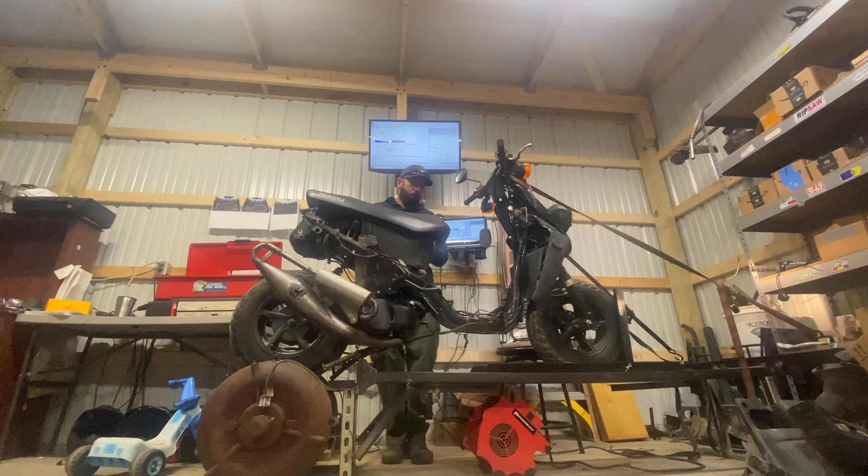Today's video is going to be back on the Yamaha Zuma 70cc big bore kit. Pretty much, yeah, we've taken a cheap China big bore kit. We had this big bore in the past with the Polini Sport. Awesome, reliable kit. I think it lasted like 5 years or something like that. And yeah, we beat the snot out of this thing. It was wrecked multiple times, not by me once again. I did pretty good on this thing. But yeah, it's been through hell, guys, needless to say.

And I just want to get in here and just do some performance stuff to these kits. More than likely, Junior's got one on the way too for his clone engine over here. But more than likely, we're going to have several of these cylinder kits. So if we blow it up, we blow it up. We're going to kind of twist around and try different things, and we can all kind of experience it together on a dyno back here.

First thing we're going to do is kind of set it up as kind of like a stunter little wheelie machine to have some fun right out of the hole. And then I got some ideas of maybe opening up the exhaust port duration and putting a nasty race pipe on there and really trying to make some power. But we got to keep where we want to make the power in mind, guys, right? Because the port timing numbers are everything to match the pipe.

Come on back here and take a look at some of these cylinders, guys. So we have our array of cylinders, and like I said, Junior's got his clone engine back here, and some of my junk I have. We had a, what was it, an Eton Beamer? Allegedly, it's a Minarelli, I guess, clone engine for the Zuma. So we're looking for another one. The one we had is kind of rusted up and stuff. The engine and everything was just seized. Everything looks good with it. So we just got to get some new parts, and he's got a big bore kit on the way.

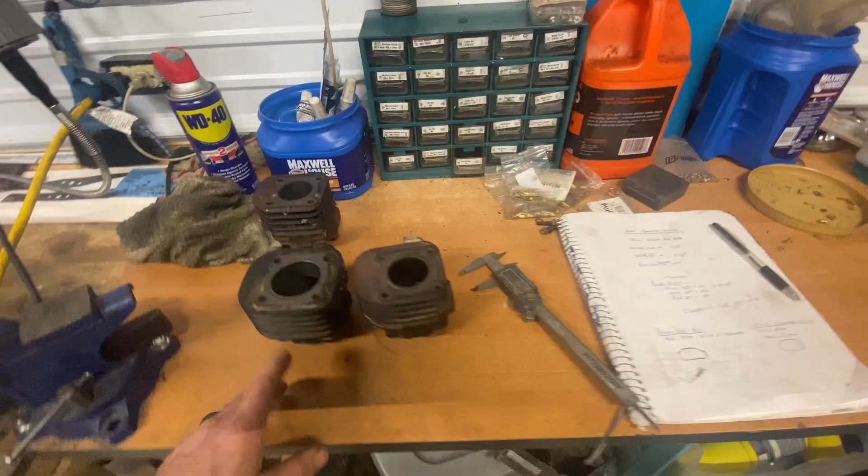And if I like the big bore kit, might end up getting another one for this, because we're going to be grinding away on this cylinder today, guys. So we may or may not like the outcome with matching this pipe. Obviously, we only have two different pipes we were fooling with. But anyhow, guys, here is the Polini cylinder and some info I just wanted to share with you guys. See if I can shed some light on the situation here a little better.

Pretty much between the stock bore cylinder and the 70cc cylinder, the port timing numbers appear to be pretty similar. I'm getting 24 millimeters from the top of the exhaust to the top of the cylinder here. So to get a reference without pulling timing numbers, just measuring for us to take notes, I would assume this has probably got 160 to 170 degree exhaust duration, but we will maybe pull some timing numbers on his engine in one of these videos coming up.

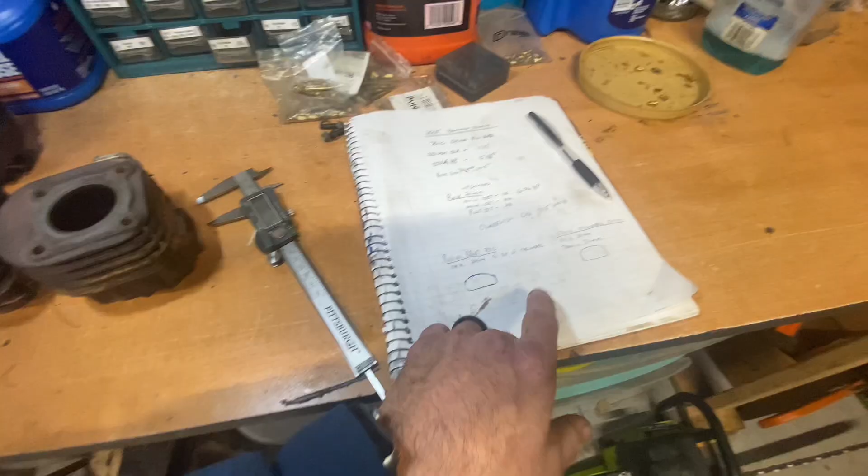So yeah, as I said, the port timing numbers all look to be pretty spot on. I even measured the transfers and everything, and I was getting 32 millimeters from the top of the transfer to the top of the cylinder itself. So that just tells me one thing, guys. It tells me that the port timing numbers, even on the big bore kits, are not much different. A little bit bigger transfers, you can see there, the upper transfers. This is the original OEM Zuma, and they all look to be rather similar in size, exhaust port wise, guys.

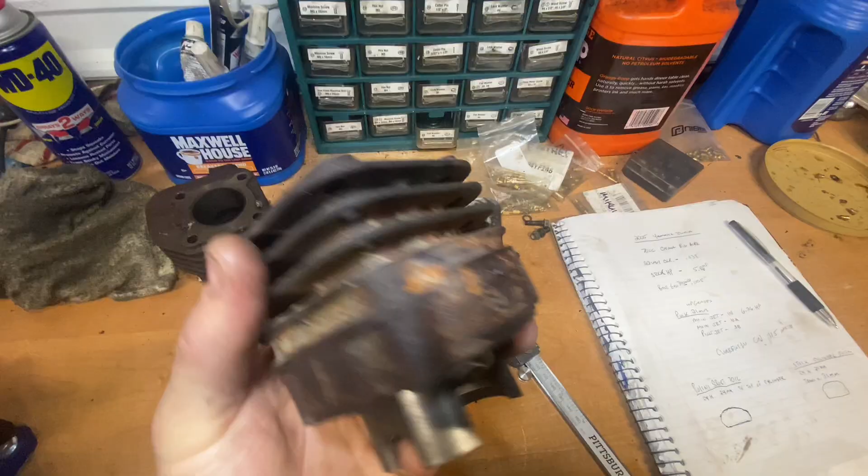Now look at this. Here is a really dirty OEM. This is one I pulled off my Zuma. Look at the round exhaust port, kind of roundish like this. Now his clone one, everything looks the same. Looks like the bolt pattern, everything looks good. Cylinder height, all that jazz. Look how squared off that exhaust port is. So I'd be willing to bet that would make a little bit of difference in how it runs. It's probably not going to be a whole lot, but that's interesting to me.

And then if you look at Polini's exhaust port, much better looking than the one I put on the bike. The one I put on the bike is pretty much the same shape and everything. You could see the round curvature on the exhaust port was messed up on that other cylinder, and we're going to clean that up when we get into it today, guys.

So, yeah, I could go on and kind of get off task here of exhaust port shapes, trajectory of the upper transfers, all that jazz, guys. But we're going to take it one video at a time. What I want to do is pull this cylinder off.

We're striving to beat 7 horsepower, and obviously with this pipe setup, guys, I'm only going to be able to go so far with maybe raising horsepower without losing my ass on bottom end. And I have to stay in the proper harmonics with this pipe and everything. So there's limitations on getting in here and what I'm going to do.

And so long story short, we're gonna pull the cylinder, guys, do a little bit of port work. I got some stuff in mind. We're not going to do nothing too crazy. Like I say, we want to stay in the parameters of the pipe.

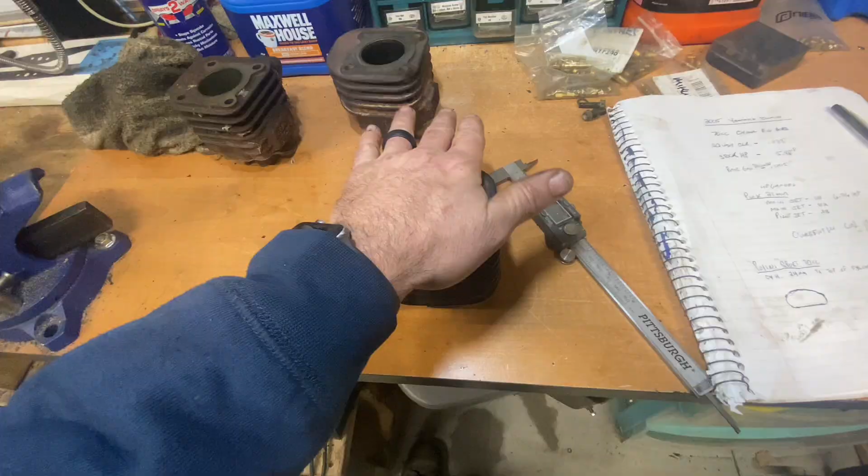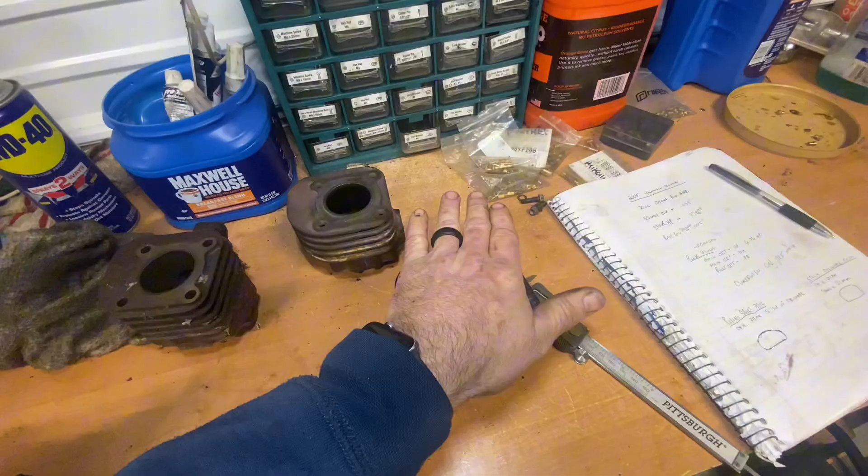The pipe's gonna look for certain RPM and stuff on that pipe, and I'll show you back here where we're hitting pretty good, pretty commonly. So we don't want to go too far out of the realm of that pipe, but I think we could squeak past 7 horsepower. I think we got it all day long, guys. So compare the quality Polini sport cylinder and exhaust ports, and get some measurements off of the China 70cc cylinder, and then go from there, guys.

Pull up some dyno graphs for you guys real quick here. We'll take a look at where we started with the stock OEM carburetor, China big bore kit, and where we ended up. I've done a lot of jetting on this thing. I've done some pipe configurations. We'll talk about that here in a second, guys.

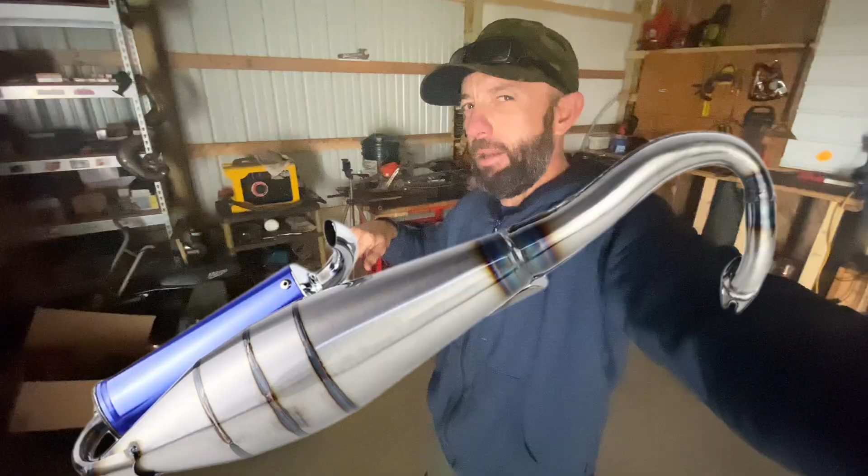Had a cheaper pipe that was meant for a Yamaha Jog, which is a similar engine. And then I had, I forget what kind of pipe this is here that I bought for it originally, and that's been the best pipe hands down, guys.

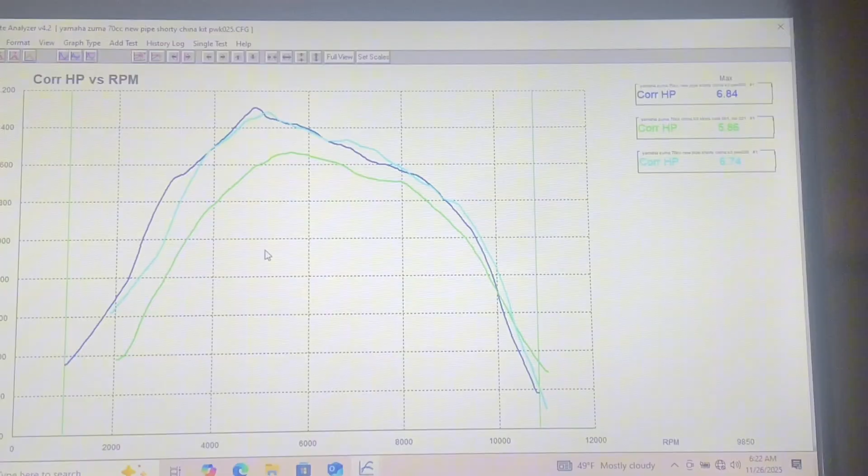All right, guys, here's a look of where we started on the best jetting, the best power we were putting down on the OEM carburetor right there, and we were banging out about 5.8 horsepower. Now we have this bike up to 6.84 horsepower, 6.7, 6.8 on the last 2 pulls I had on it the other day.

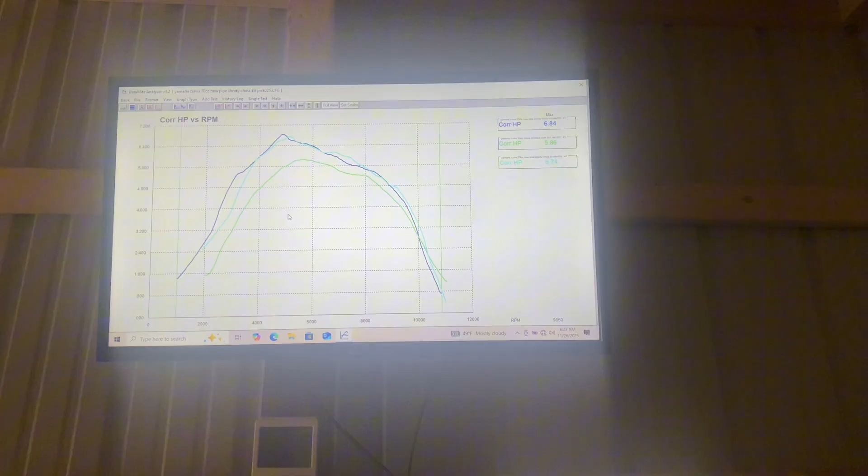I hope I'm not getting too windy. But speaking of that, this morning it is so humid. It feels like it's going to snow. The humidity got a little better, guys, 69%. It was like 74 in here, and plus I threw some heat in here a little bit ago on the turbo heater back here. So jetting is definitely way rich.

We ended up on a 115 main to make that power, but this morning, I'm not gonna lie, we were doing several pulls and staying right around 6 horsepower. And what that is, guys, is just jetting. It's really, really humid compared to when we pulled the other day. It was really foggy, you couldn't see 50 yards, but now it's clearing up. So we'll leave the 115 in it for now, do some pulls when we get the cylinder back on.

But yeah, guys, so we're doing pretty good. We started out around 5.8 on the stock carb, did the PWK 21 mil upgrade, jetted that, and we got a little bit longer stinger back here, and pretty much we're ready to almost break 7 horsepower, guys. Like I say, we're going to be limited with this pipe.

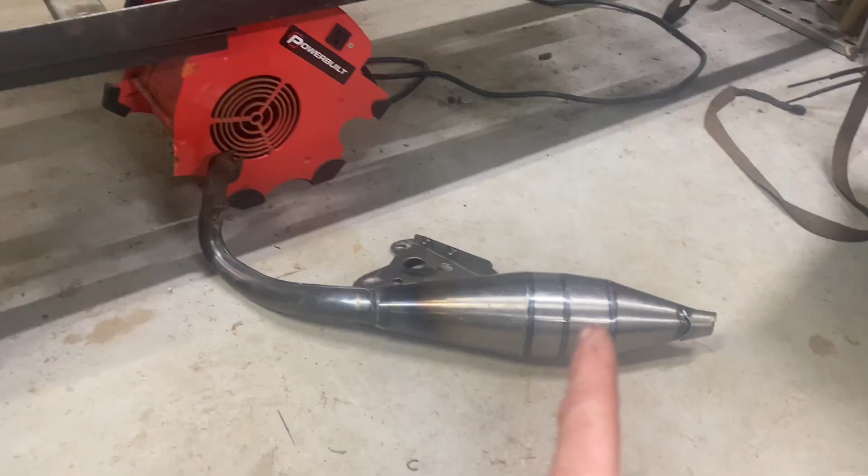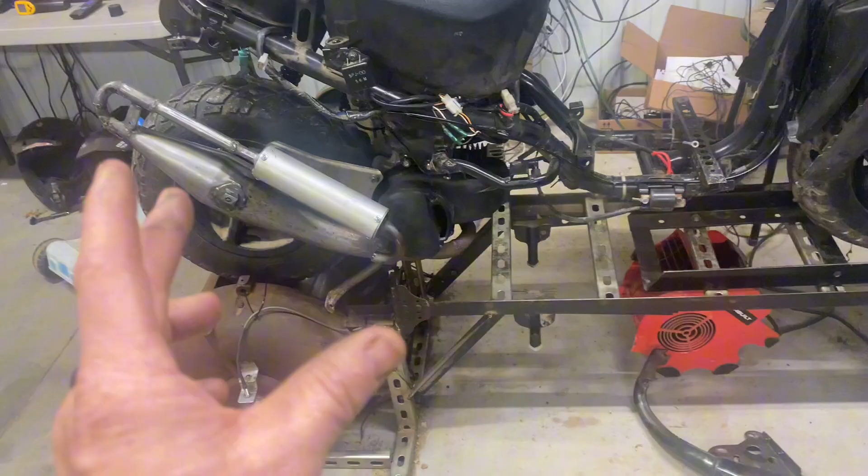All right, let's talk about where I was. This was a pipe that I got a while ago off of eBay. It's like your cheap expansion pipe for like 80 bucks or so. It's got the little blue silencer on it. I think it was meant for a Yamaha Jog. I kept staring at the original sport pipe I put on there, and I thought, well, this is a little bit fatter pipe. Let's try it and see if it hits any better down low.

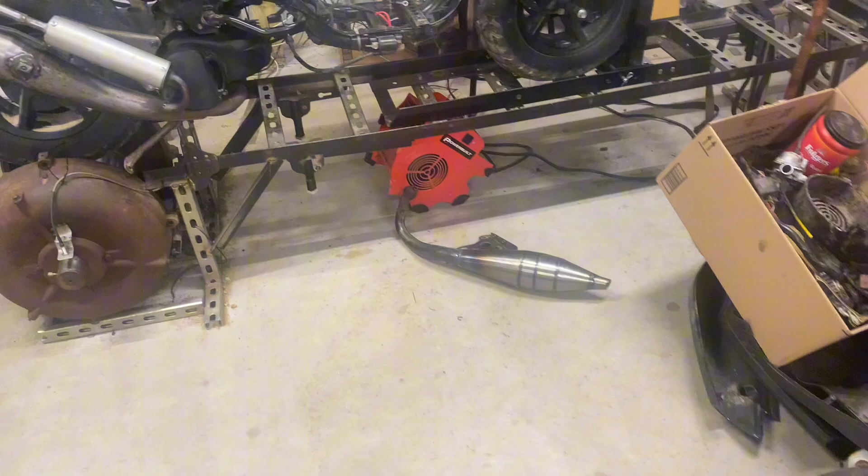And I had longer stingers on it and shorter, and it just didn't like anything I threw at it. I tried my hardest to get it up there in the 6 horsepower range, and we flat out could not do it on that pipe, guys. This pipe here was Giannelli, if I'm not mistaken. I'd have to read it myself. Extra 2 pipe. I'll post a picture, guys.

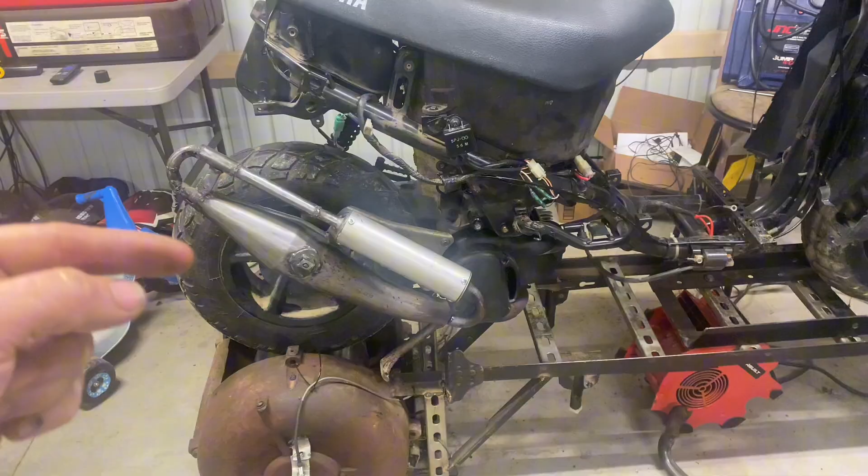This pipe hits really, really well on the 70cc. I mean, I'll be honest, guys, this thing is running like a raped ape. It reminds me of running like a dirt bike. As far as the CVT goes, we'll have to get to that too, guys.

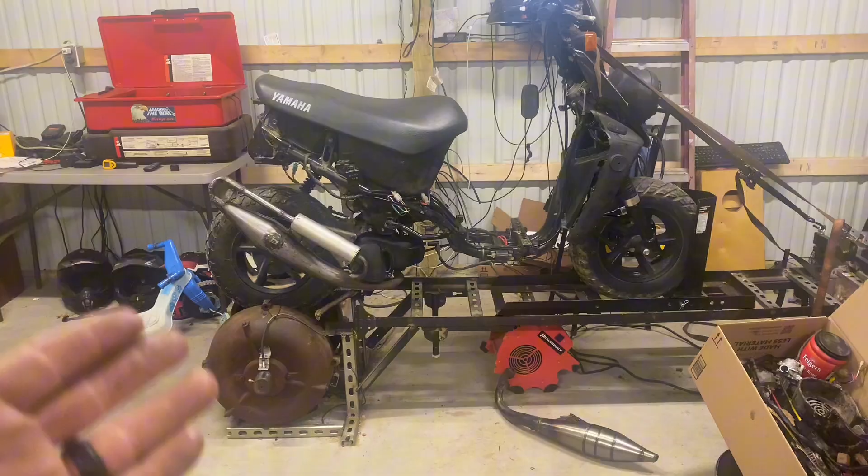I can't quite remember. Like I said before, I'm not really up to this scooter stuff and CVT transmissions. I've done work on them in the past. Obviously, that's just not something I do every day, and it's something I have to reacclimate myself to even getting around to doing. But anyhow, it's loving this pipe.

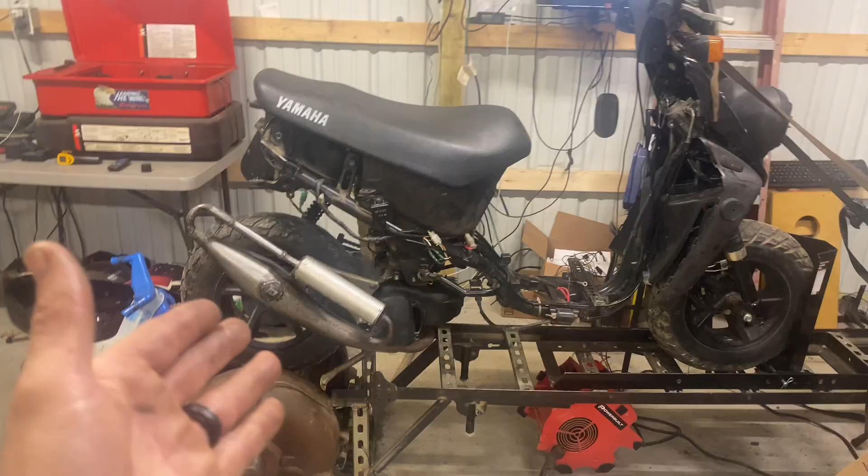It's liking this pipe. We have the stock cylinder on there. We're going to pull that off. We didn't do anything else but put this pipe on and the PWK, which is awesome, guys. I said it before, I'll say it again. Get yourself a Keihin and you will not regret it, especially a PWK.

So first and foremost, we're going to pull it off and see what we can do and try to favor where we want to keep this bike fun and riding. We're going to try to get out here and rip some wheelies around town and see what kind of fun we can have even back in the trails and stuff. It's an absolute ripper, guys, 100%.

I've always been a big fan of PWK. Every time I put them on other bikes, they just run awesome. They tune easy. Like these style carbs, you can get right to the main jet just by unscrewing a little cap and O-ring, and you're in there. You can even sneak the idle jet out sometimes. But I'll quit running my jaws, guys.

Just wanted to fill everybody in because I did do a lot of testing. You guys have no idea. You got to understand that dyno testing and doing all this tuner style stuff, it just takes so much of your time, and to bring you guys along to do all that, I wouldn't have got that much info.

Did I gain much off the longer stinger? No, I don't think it gained a whole lot, just a little bit maybe on low end. The longer stinger with that silencer, it's a KTM 50 silencer, did make it a hair bit louder. I do have a little bit larger outlet, and then it necks down and then into the KTM 50 silencer. So it's kind of funny, just testing stuff out, guys. Let's start pulling this cylinder off.

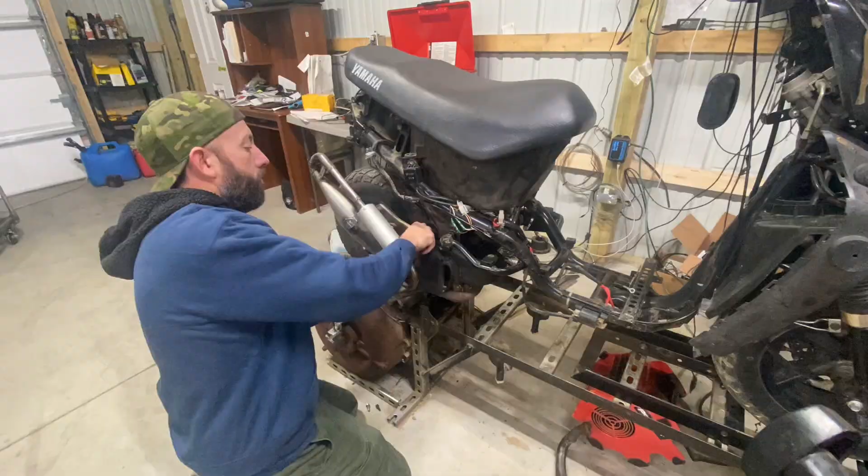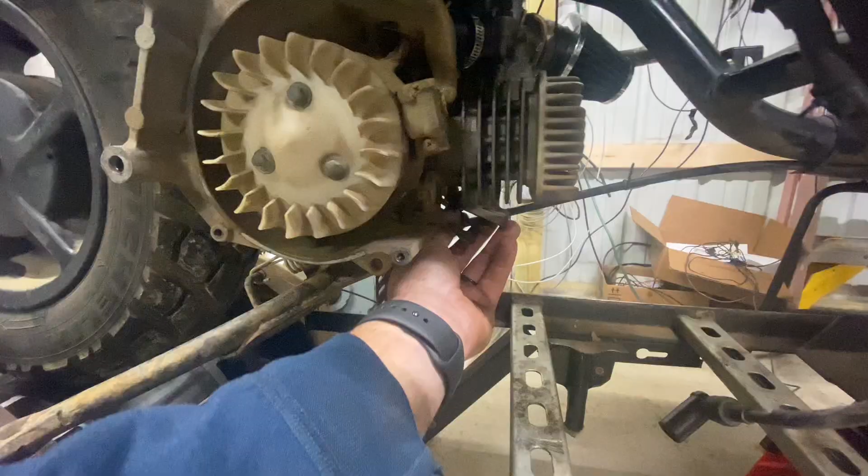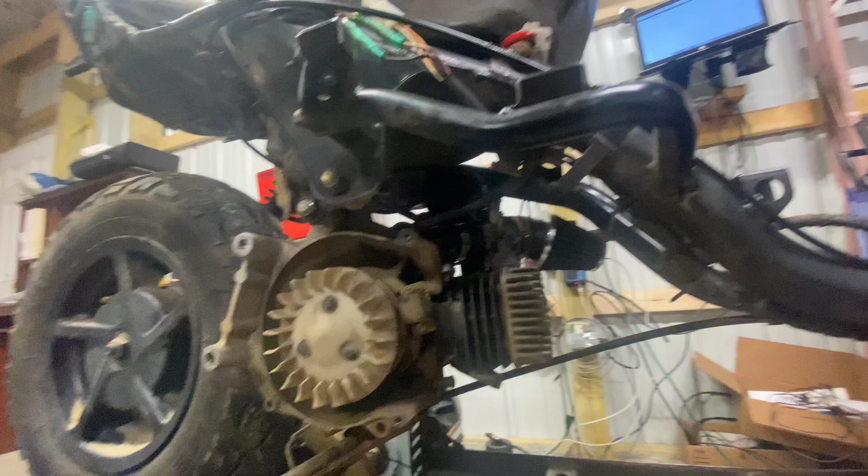All right, there's a look at the old Chinese. Take this gasket and bolt off here. The old Chinese 70cc big bore. Now, if you're looking close enough, that is the Polini Sport head that I had taken off to use on this cylinder. It's got an O-ring style head gasket, so we were able to seal that back up, which is nice. Should probably order a couple of those in.

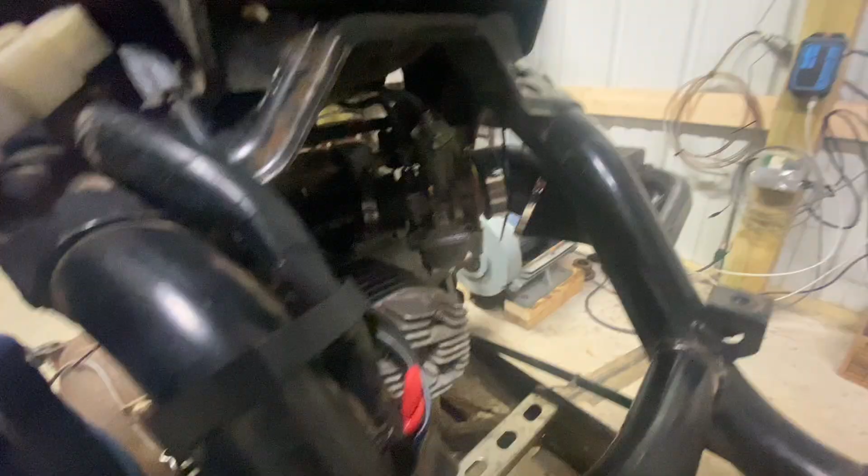Anyhow, just wanted to give you guys a little shot. I'll get these 4 bolts off here. There's a look at the PWK back there, guys. I'm going to be looking for V-Force 3 reeds to put on here, and we will do a before and after with dyno. On the RM85, when I did V-Force 3 reeds, it did slightly lean out the bike and lose power. I did have to rejet on that, and they say that you shouldn't have to, but I found out that I did.

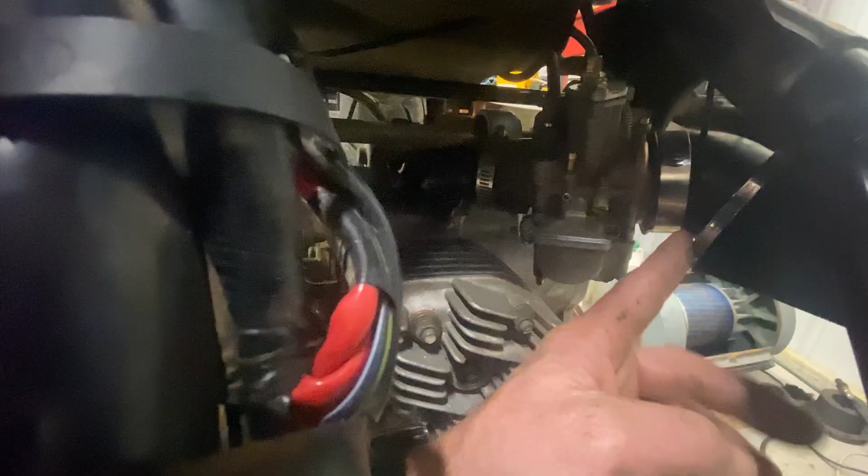Could have been weather conditions and multiple things, humidity and stuff like that, the day I did it. So yeah, I want to see if I can get a 21 mil boot for this carb too. I kind of just used that fitting there. I think that would probably be a wise thing to do, but the carb isn't going anywhere. It's pretty stout sitting in there, guys. I do have a zip tie around the airbox just to hold it better under slight loads and vibration, etc.

We'll get this cylinder off, guys. I have a feeling it's going to be pretty close. From what I remember, it's really, really close to the Polini with the port shape, size and stuff. I'm willing to bet we're going to be 24 mil from the top of the exhaust to the top of the cylinder again. So we'll see. We'll get the cylinder off here, guys, and get it back on the bench.

All right, guys, have a look. There's the terrible design piston. Look at the freaking texture on the top of that piston there. This was the cheapest big bore I could find on Amazon, but guys, the piston is actually in pretty good shape. Now, as you can see, I dropped one of the rings. We are only running one piston ring. That's what I wanted to do.

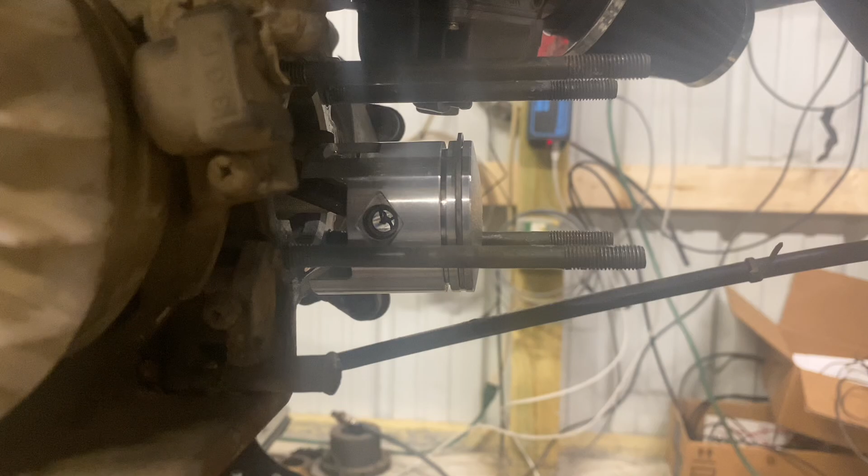One, we're gonna lose rotating mass. That piston dropped in weight more than you think probably without that one ring there. And that's less parasitic drag. So that will make the engine essentially not work as hard. The other ring definitely would help with compression. But you gotta think, it's more drag, also more weight on that rotating mass.

Let's check the cylinder out back here, guys. Well, surely it's a little glazed for sure. We'll fix that. Run the old ball hone on her a little bit after we get done doing a little port work here. But if I look into this, now you can see right there. You see that, guys? See, I get the white background in there. You see that? We're gonna oval that a little bit better.

And we might even take like 0.2 millimeter to 0.5 millimeter off of this thing on the exhaust roof, and we're gonna get in there, sneak in. A trick of mine I've done, it works well in the past, is just sneak in there and widen that exhaust, and you don't have to really take too much off of the cylinder right here, just a little bit, and just widen this exhaust port up.

I like the shape of that exhaust port. It's a favorable shape from the porting I've done with widening the exhaust. From my experience, that's favorable. We're gonna get in there and do a little work. Again, we're doing mild. If we can punch this thing over 7-ish horsepower and make it a fun machine in the trails and out there on the road to bump up some wheelies. Now, a lot of that can be CVT tuning too. I know that, guys. This one's set up pretty decent back here.

I bought a Malossi kit when I first put the big bore kit on there. Do not ask me what gram rollers or any of that stuff. I think I do have a Malossi variator. I think the rear pulley, for lack of better terms, is an aftermarket one as well, a performance one. And I think I'm running the stock clutch and not sure which clutch springs.

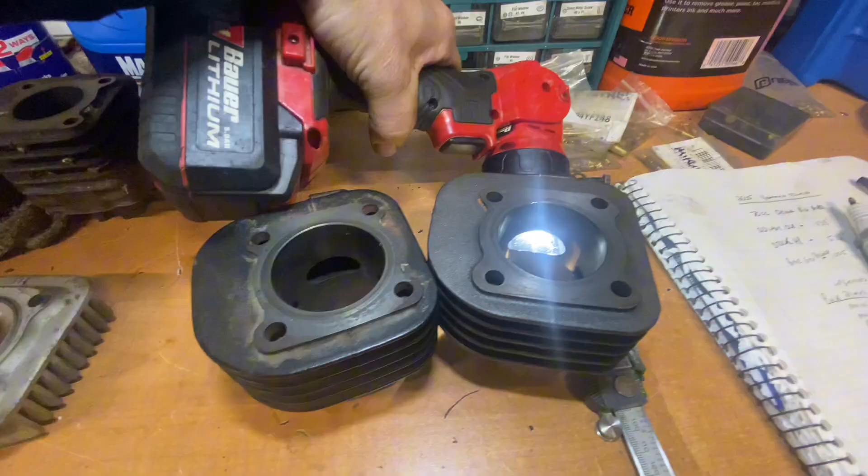So let's get some measurements before we start porting, and we're going to compare this to the Polini Sport real quick. 100% the lighting sucks. I know. Let me do something. All right, let's see if this helps. A little bit. So there's that exhaust port. And here's the, I need to give myself more room. All right, guys, I got a flashlight here. So here's the exhaust port on the cheap cylinder.

I did hone this a little bit, and you see there's piston transfer. This Polini cylinder, we're going to reuse it. It did blow up. It did snag a ring. We are going to try and get some acid on these aluminum markings, piston transfer, and bring this back to life for sure. But if you look, here's the China cylinder. It's really glazed up, guys. The exhaust port looks damn near spot on.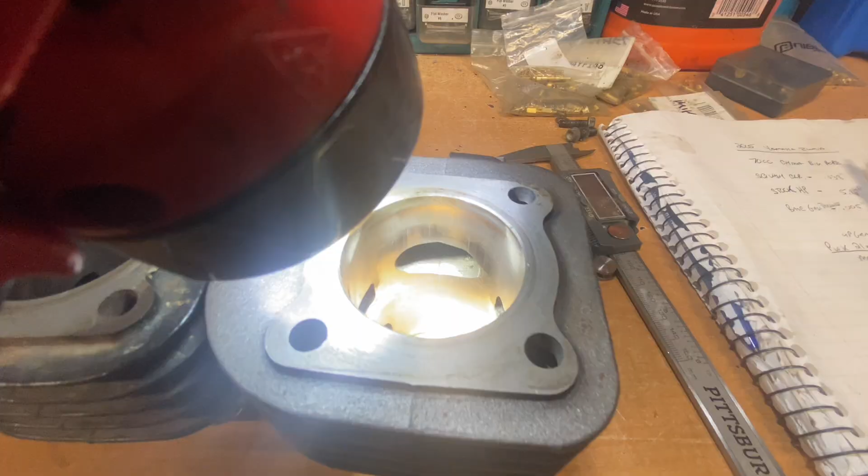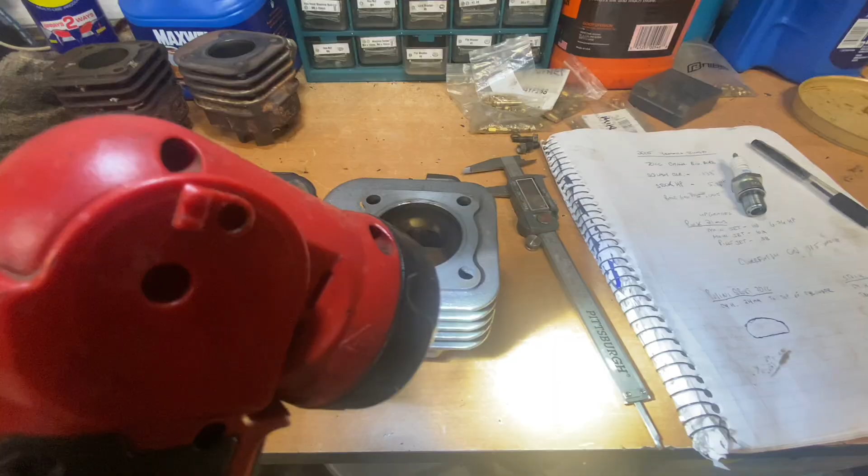I could go get my bore gauges and stuff and get inside diameter, but we can see that it's pretty much the same. Let's measure the exhaust roof from the top of the exhaust port to the top of the cylinder and see if it's the same, which would mean it's pretty much mimicking all the same exhaust port duration. Guys, I just discovered something very, very interesting here. Take a look.

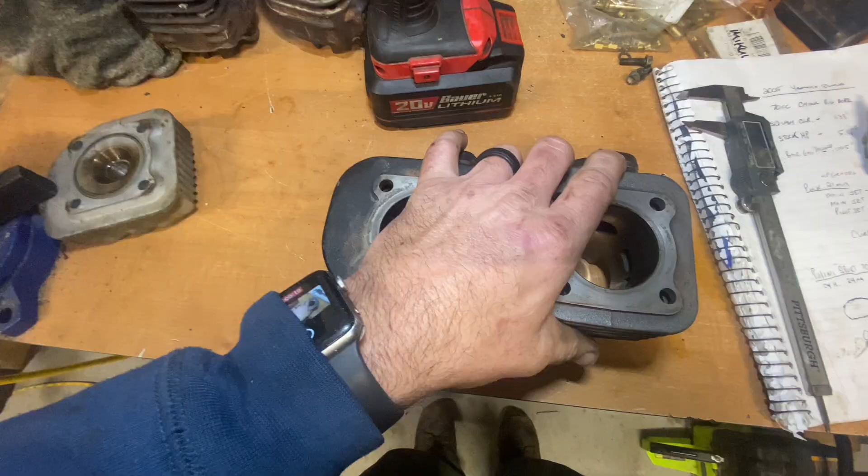Yeah, I'm back and forth and remeasuring stuff. I'm like, you can see this with the naked eye. So I have a 21 millimeter exhaust roof on this one. Not the size of the port, from the top of the port to the top of the cylinder, the stroke. Okay, when that exhaust port closes, that's your power stroke.

Okay, look at this. Here's the Polini. Look at that travel from the top of there. Now bump over. You guys see it? See the spacing? There's more of a stroke on this Polini cylinder for sure. It definitely has lower port timing numbers.

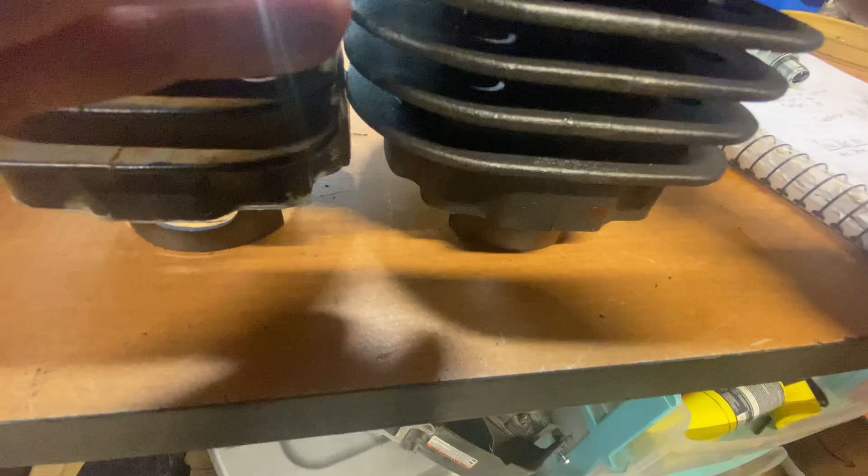Man, so what is this? So we have 21 millimeter here on this one, guys. And take a look. I know the lighting sucks. Lighting really sucks here. 21 mil, right to the top there. Now look here.

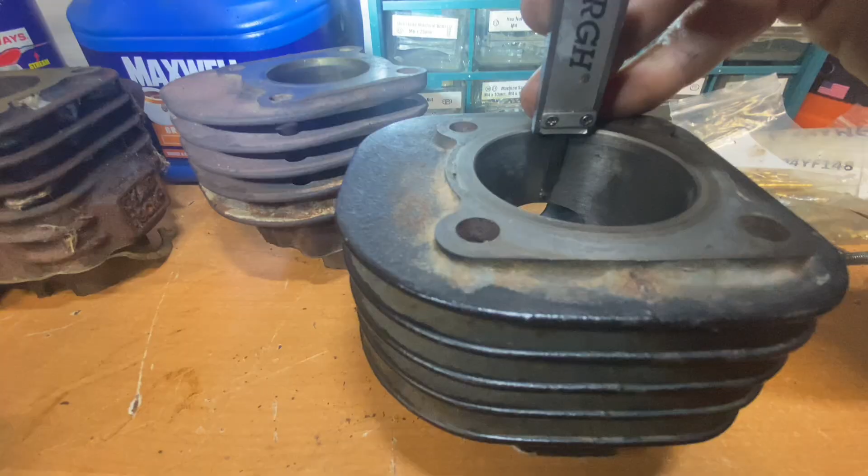It don't look like much on camera, but that is definitely, you cannot see this. This would be trying to sneak a tripod in here some way, shape, or form, but it's kind of hard. You can't see it too well. Let me put it against the, see the gap there? That's a lot more port duration than you think, guys. 3 millimeter? You better believe it.

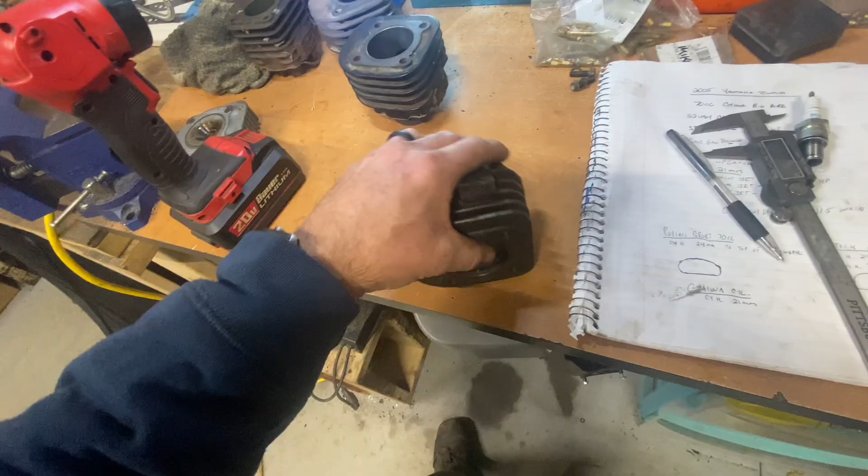Interesting stuff. Interesting. I'm excited now to see what, see, Chinese, they're not stupid, guys. The quality might not be there, but they're not stupid. That might be why this thing was putting down pretty impressive numbers. Guys, I think we're just going to really just reshape that exhaust roof a little bit, and we're not going to raise it for sure.

So this is interesting. This is so interesting, guys. 3 millimeter grinding an exhaust roof out. That will be a noticeable difference. Now, that being said, we're base gasket deleting here. We're striving for retarding the port timing numbers like the Polini. So it'll be interesting. So long story short, this freaking China cylinder back here actually has a higher exhaust roof, which is going to lean towards more top end power.

It's got me really, really curious on port durations and getting it on the wheel. We're not going to do that in this video. Obviously, we don't have to do that for the little bit of port work that we're going to do, and it may not even shed a whole lot of material for the dyno. We're going to find out. Obviously, with this high humidity, we're going to have to rejet this thing, but that's so interesting to me, guys. Yeah, this kind of slowed me down here.

So we have the 5000 base gasket on here, and what I was going to do is just alleviate that and Honda Bond it up, and this is going to drop the port timing numbers down. Like I said, it's going to retard the port timing, and that will get us in the ballpark of the Polini numbers more than likely. Well, not 5000s, but it will definitely drop. It will definitely retard the timing just a little bit. But that's so interesting, guys.

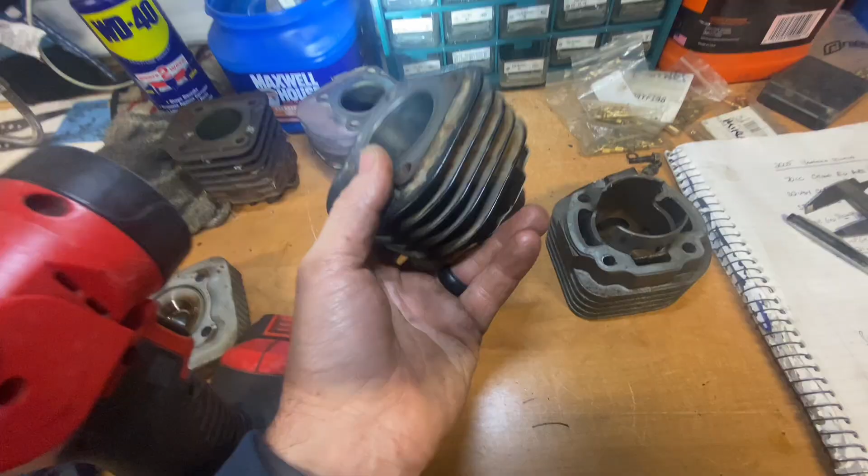So we can work with this Polini cylinder too. Get another piston, another top end for this thing, and we will definitely work with this cylinder too. It'd be interesting to bolt this back on and just see what it does stock compared to this Chinese cylinder. They're not being stupid when they're putting these out. Yes, the quality is probably not there. Obviously, you see the piston. If they could just do a little bit better on the piston quality, surely it would be something that y'all might want to think about getting.

Now, like I say, I'm running the quality Polini cylinder head on this thing. Why? Because it's reusable O-ring. Well, hopefully it seals up again for us. It should, but that's so interesting. Anyhow, I'm just babbling on. Wanted to show you guys that.

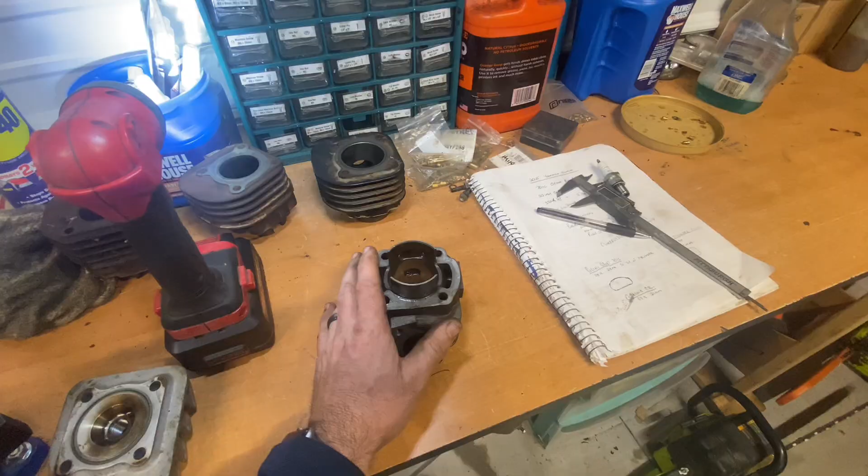So we'll start getting this geared up for some port work. I'm going to measure this base gasket again now that it's been compressed, so we'll really get an idea in our notes how much we are going to retard this cylinder. And I'll keep in mind when we put our layer of Honda Bond on here and put it back on, that'll probably be like 2 thousandths or so. So it's not going to be nothing too crazy, but it will ever so slightly retard the port timing numbers.

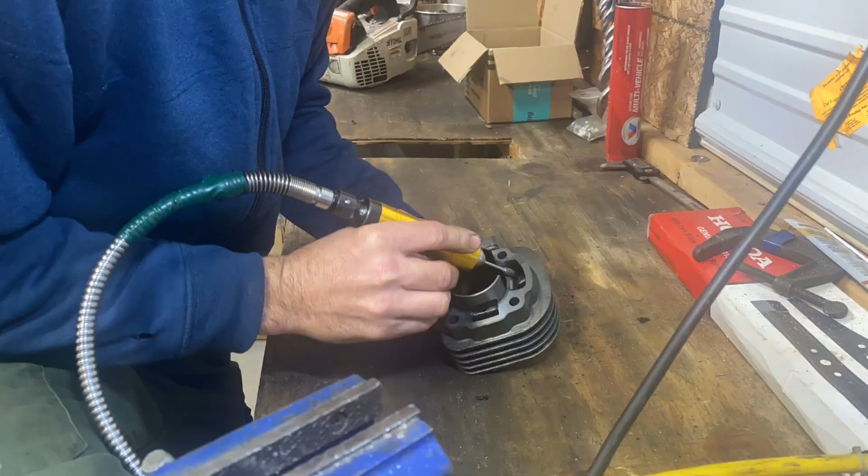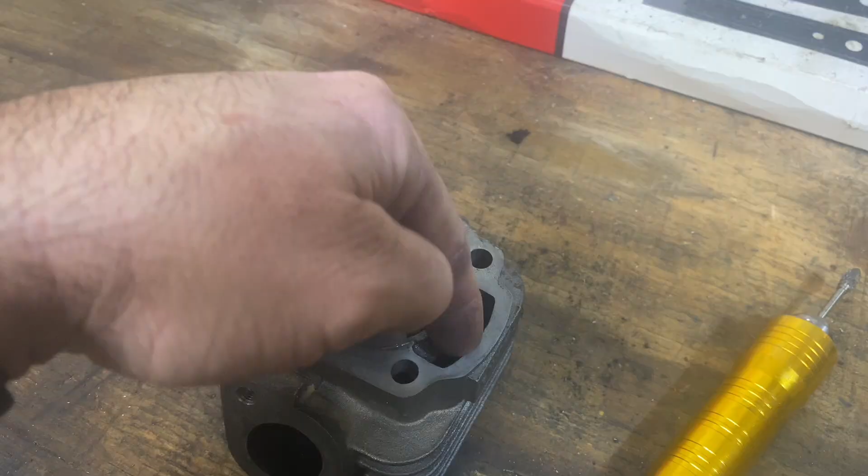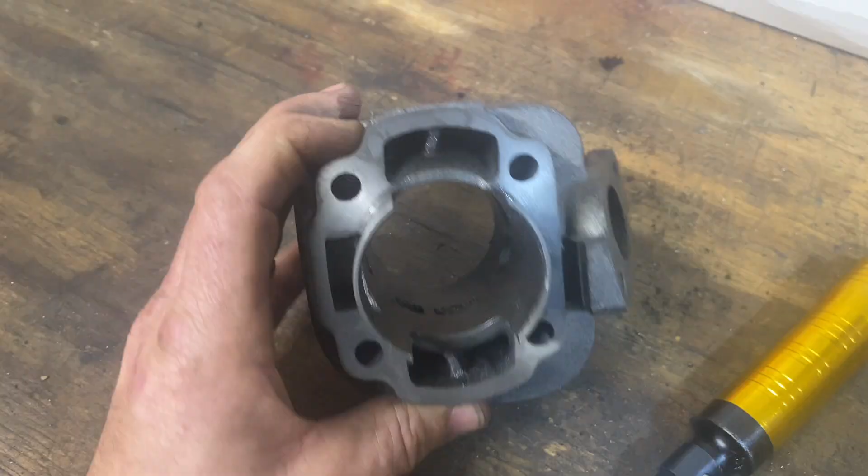It's not always about the one thing that works. It's about all the little things that work, right, with doing this. So I'm getting rid of that blunt edge. If you look at a lot of your quality dirt bike cylinders, race bikes, they're 100% going to look like that. So keep that in mind. They're doing it for performance for a reason. There's a ton of things you can get into with this and where you want the power.

We obviously don't want to hog out these lower transfers too much. We want to keep the velocity kind of up on this, especially if we're trying to make this a wheelie bike, guys. We don't want to get too crazy with opening these up. Now, if we're getting a pipe for higher RPM and start to really raise the exhaust roof, come back and do this again, yeah, we're going to hog these out.

We're 100% going to hog out the lower thing. But I just wanted to show you guys real quick how I'm blending that in there. That's all I'm going to do to the lower, pretty much, is just shape that in, guys. And we're going to start chomping away at the exhaust port. And we're going to do a little bit of intake work. We're going to straighten this up a little bit there.

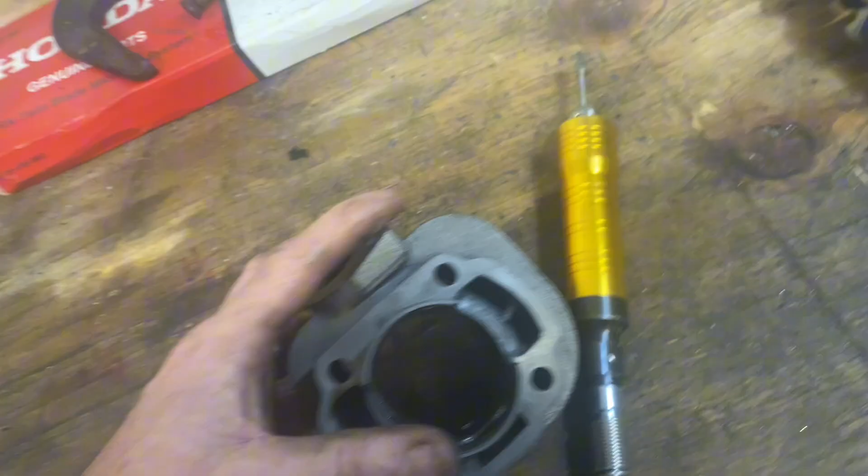See how ugly that is, guys. I might just smudge away at the floor of that intake. And that's going to be it, guys. And we're going to go in here and reshape that exhaust roof that looks every bit of horrible there, and just barely take a little bit of material off the exhaust roof, and then we're going to widen the exhaust just a little bit, guys.

Yeah, just trying to explain to my little buddy here how I can't get over how they raise the exhaust roof on this thing. It's kind of crazy, but we're real curious to see what his cylinder is going to be setting at once it comes in. And I was trying to explain to him the theory, how you can gain power raising the exhaust. But we got to keep in mind, I've said it my past 3 videos, where you gain, you lose. You got to keep that in mind. There's also a balancing effect for sure.

He's learning. That attention span, you know how that is when they're that young, but he's learning.

Let's get back in this cylinder here and start porting away, guys. Just wanted to show you guys, I've been grinding away. Just touched in there with a little bit of widening of the exhaust. We're not going to worry about polishing. Guys, you ain't gaining a whole lot doing that. And yeah, if you're going to sell your cylinder, you want to go the extra mile. Yeah, I could make that look like a mirror. Just a lot of extra time.

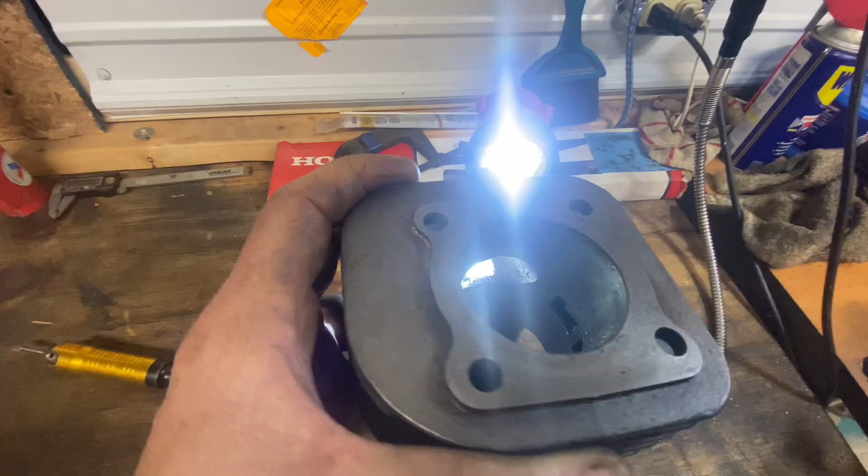It's mainly port shape and what you're doing with the port. We got in there and knocked a lot of that rough texture off. Best we're going to do there. We definitely shaped the top of that exhaust a lot better now. It doesn't have that unsymmetrical little line. It's like it just wasn't cut right from the factory. And I think we're about done with that, guys. We're definitely not going to go crazy.

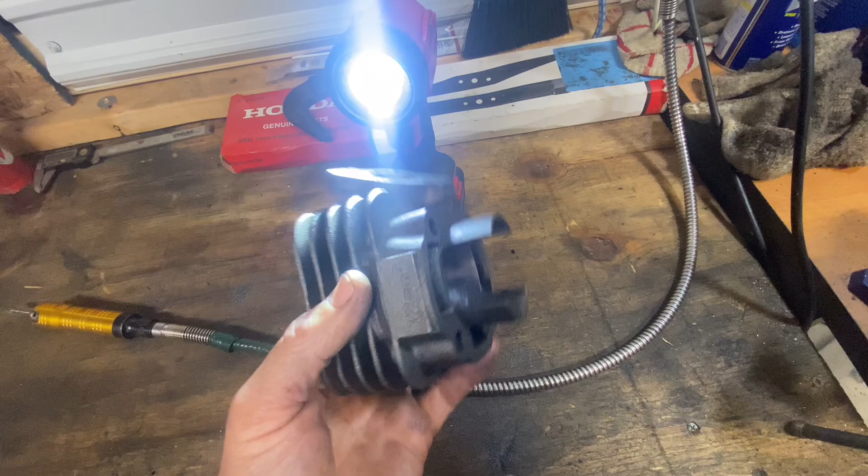I'm going to get in here and work on the intake a little bit. And like I say, all we're doing is going to clean up the bottom of that. You can't see it because I got metal everywhere now, but it was really rough. So we're going to fine edge that. Just take a little bit off the bottom there, and then we're going to work on these upper transfers.

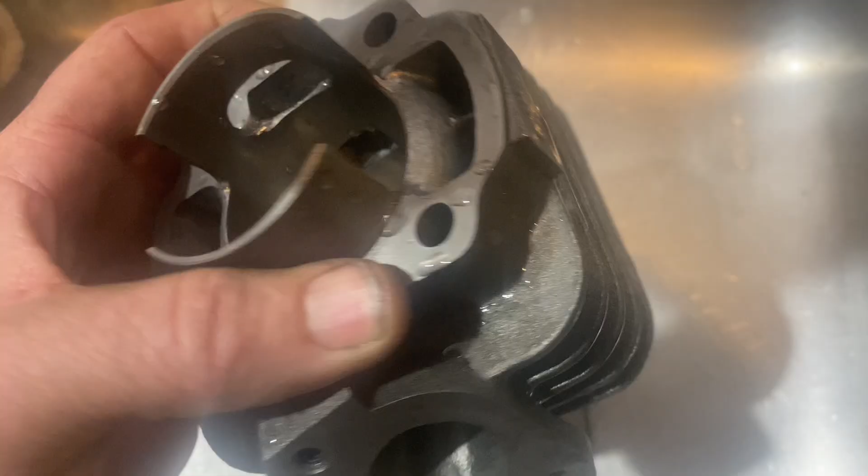All right, guys, we got the porting done. And I just want to show you guys real quick, we did the lower transfers. We didn't hog anything out. We did blade the inner portion there a little bit, but other than that, we didn't go all the way down. Cleaned up the boost port, worked on the lower ridge of the intake. We widened the exhaust. Just came through and touched up the exhaust roof because you all seen how messed up that was. Let's see if we can get this on camera, guys.

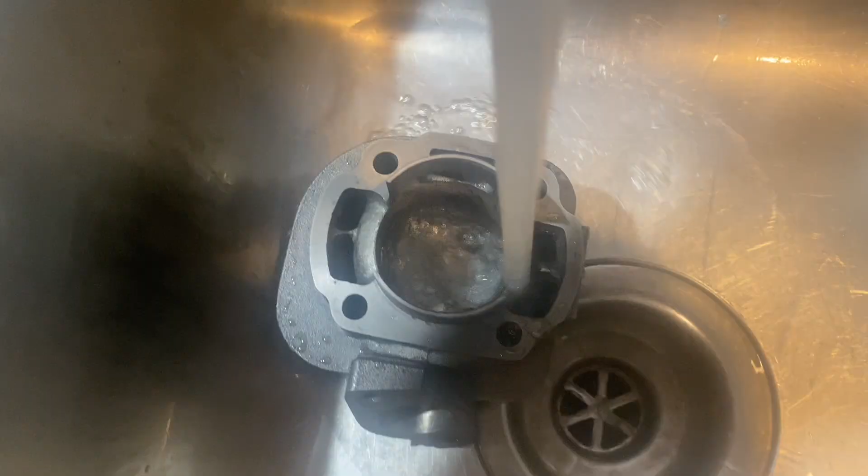If you ever want to see how your transfers are flowing, there's your primaries kicking back there. See how they're kicking back? There's the primaries. Now we did do some primary transfer work. We opened the windows up a little bit. Didn't change any duration. And there's the secondaries. See how they're shooting back towards, and then here's your boost port.

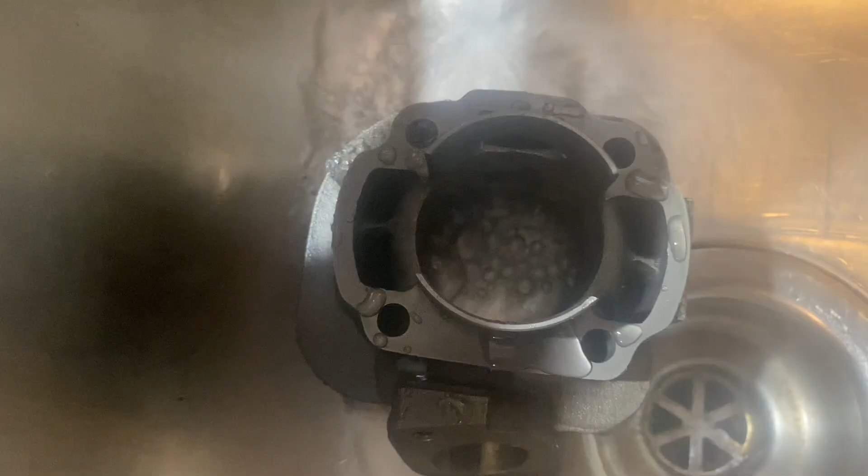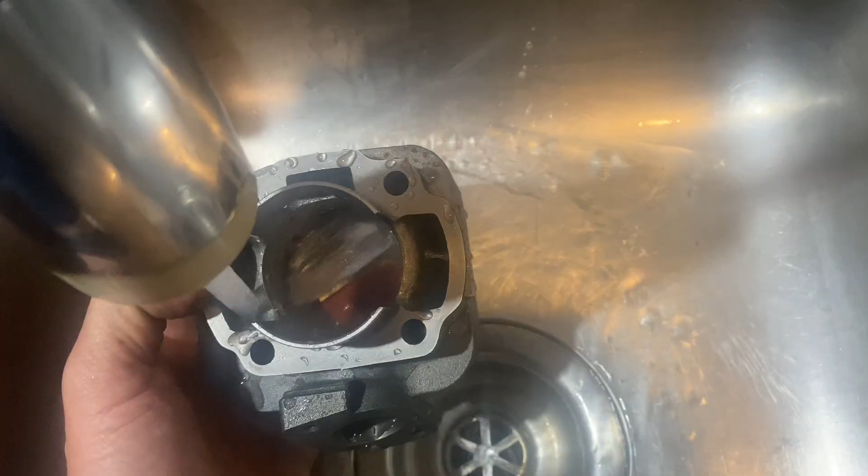That boost port angle, watch how that shoots into the combustion chamber. See that? Shoots straight up towards the top of the combustion chamber there. Really steep angle on the boost port there on this cylinder. Most cylinders are like that anyway, with your dirt bike cylinders. If you want to see how your transfer ports are flowing, just get the old sink going, man, and water flowing, and hit your primaries there. Flowing pretty good, and this one kind of shoots the same direction, just more straight across.

And then here's the boost port. Can't really see it on camera, but it is a pretty steep angle shooting up towards the combustion chamber. And there's that, guys. Go out in the shop, take a look at this thing. Get ready to bolt this thing back on soon.

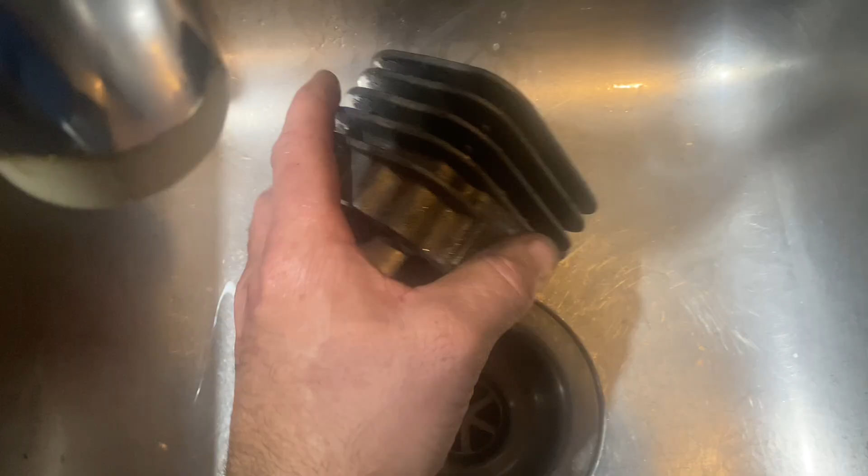Remember, we're going to minus the base gasket. We're going to Honda Bond all this up. Drop the port timing numbers ever so slightly and see if this thing maybe will hammer a little bit better down low with retarding the numbers. We will gain a little bit of compression too off of dropping the cylinder down because we're going to be closing the squish gap a little bit, which we had room to do because this was a pretty sloppy squish gap on this.

Here's the final product. I say product. I'm selling it to you. You will buy this cylinder because it's going to be a mega stunner cylinder. I'm fooling myself. Had to have an outburst.

But as you can see, guys, the top of the exhaust roof doesn't have that blunt edge anymore, that little straight edge, like it was just casted wrong. If you can look, we widened the exhaust, all that looks pretty good. We chamfered everything. You got to get your finger in there, guys, and make sure nothing is really sharp on each one of those ports you did work on.

You come over here to the primary transfer. You can see we opened that wall a little bit on that. We didn't go a whole lot, and we did the same thing for the other side. We pretty much got in there and just widened the transfer window just a little bit, kept the same angle, didn't change any angles. You can get into changing angles too with where you want to put the power on these things too, guys. Sometimes you can cross angle them too.

It's interesting. If you haven't already heard or seen anything about any of Eric Gorr's books, I highly recommend it. And the Two-Stroke Tuner's Handbook, for sure, hands down. Something you should be reading if you want to learn.

Got some crappiness in there still. It's not the most beautiful exhaust out here, but we did open that all up a little bit and get all the garbage. It feels better than it looks, guys, 100%, but we're about ready. We're going to do some final cleanup here, run a paper towel through here a bunch, make sure we get all the little micro deposits out of this cylinder, because if not, you're just going to send them right to your bearings, scar your piston up, and do all kinds of unwanted damage.

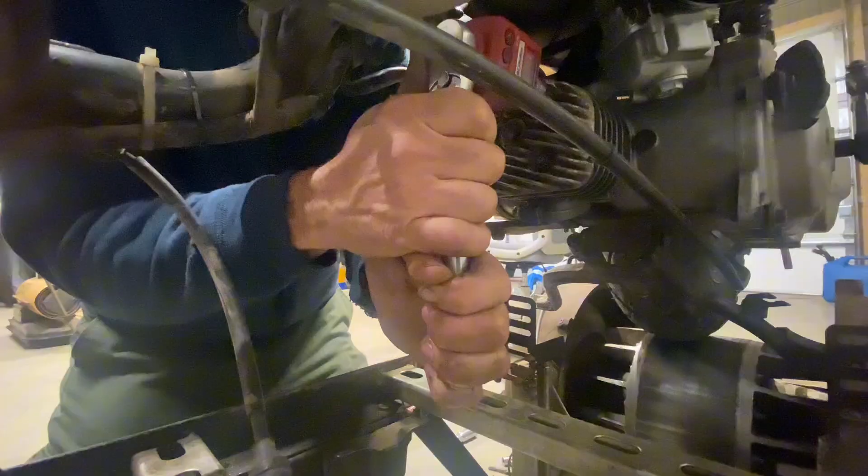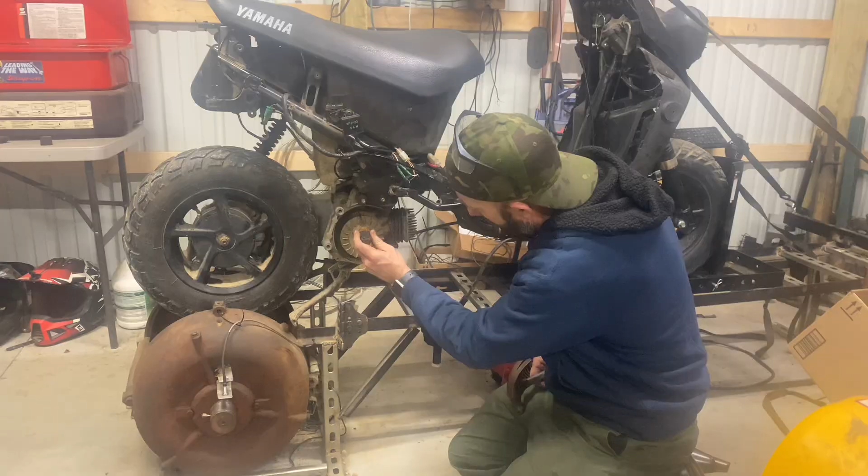Alright guys, so real quick here, I just want to show you all what I'm doing. I went ahead and pinged the stator to the case. Now this may have a timing mark on it. I don't think it does, but it may. I looked in there, it's still a little dirty, needs cleaned up a little bit. But we're going to get in there and modify the stator plate so we can advance or retard the timing on this thing. And what I did was just put the screwdriver in there and then I pinged it. So when I go in to do this, I know how to put it back on stock timing. It's a pretty easy process.

I might even come to find out, being uneducated with this style engine so far, that there is already a timing mark, which there very well could be. But that's just something you could do. And it's something we're gonna look into, is advancing the timing on this thing. I didn't get a really good plug read yet. I need to go back here and examine this plug and look for the timing strap. But we're gonna see if we can pull more time to break our 7 horsepower too, after we see how this port job does.

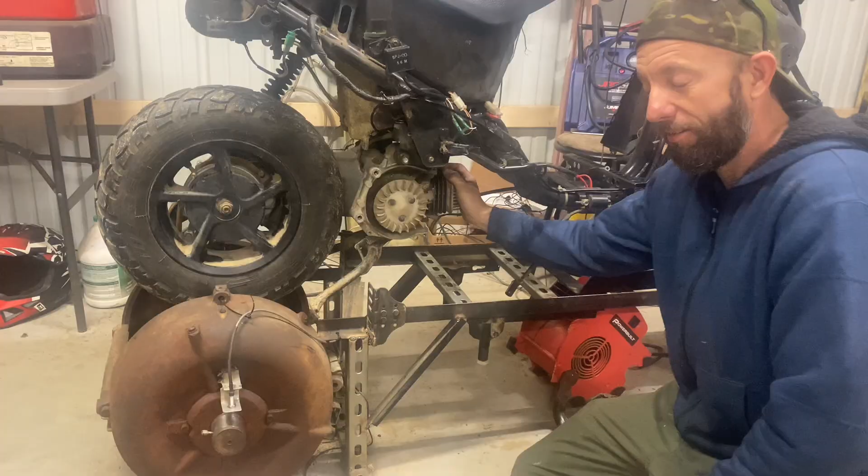Telephone? Who is it? Someone's calling us. Yeah, I got two-way radios back there, so something's going on. Somebody's playing around on the channel back there. Anyhow, guys, so that's that. Just wanted to show you.

Obviously, the engine is rotating clockwise, so you want to move the stator plate itself counterclockwise to advance the timing. Just thought I'd show you guys. Just went back there, we confirmed we have 34 thousandths squish now, and we did have 38 thousandths squish, so it's just a simple aligning your solder up with the wrist pin and cranking it over. And if your solder's too big, you can always smash it down a little bit. You just got to make sure it's in there lined up perfectly. If it's off a little bit, you might have a little bit of trouble there.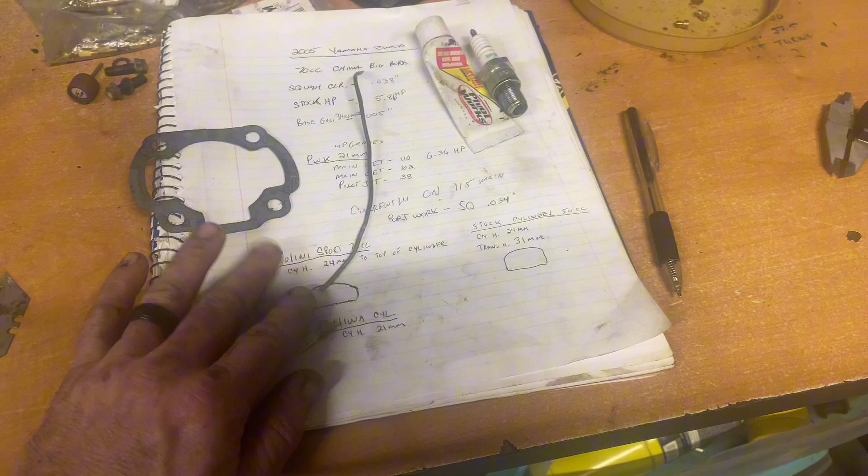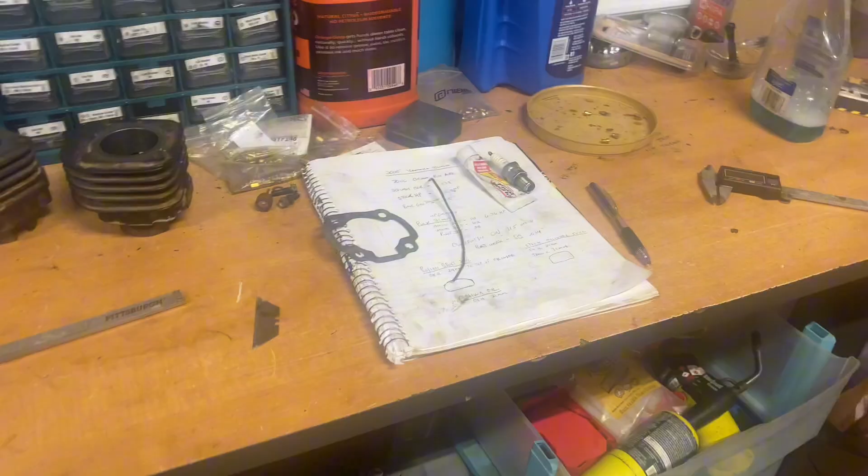But yeah, so we got about 4 thousandths difference in squish. The base gasket was 5 thousandths Honda Bond, so that's pretty precise. We probably lost 1 thousandth on the Honda Bond. I usually say around 2 thousandths. So hopefully everything seals up, guys.

We got Junior back here cleaning up the piston on the Minarelli 50 back here. Everything was just seized up. It's like it might have had carburetor issues, like I said, whoever had it before. So he's going to try and get this thing going on the stock cylinder, stock piston at first, get it popped off. The CVT components were all rusted up. We cleaned a lot of that up. So trying to get another bike. The other bike's pretty rough, but the front wheel's locked up too, so we could still slam it in the chassis and play around with it, and maybe we'll get some bone stock numbers from his bike on the dyno too, guys.

Yeah, so now it's just a matter of letting the Honda Bond set up, guys, and getting everything back together here, like I said before. So I'll let that go for quite a few hours before we get back here, but fingers crossed that everything works out here. So we definitely dropped down on the port timing a little bit. We lowered the exhaust duration, so that should gain us more compression stroke there, driving that piston up. So that's obviously gaining us a little torque. We're also going to throw in a little bit of added compression there. So we'll just see. Maybe it'll really like it, maybe it won't.

Also, there's going to be road testing involved, guys. It's been really, really shitty weather. We had plans to get the pitters out today, and it's just so sloppy back here on the track right now, so that's not happening, obviously. So we'll see you here soon, guys. We'll check back in once this all seals up, get everything back together, and we're going to see what kind of numbers we put down and hopefully do some road testing.

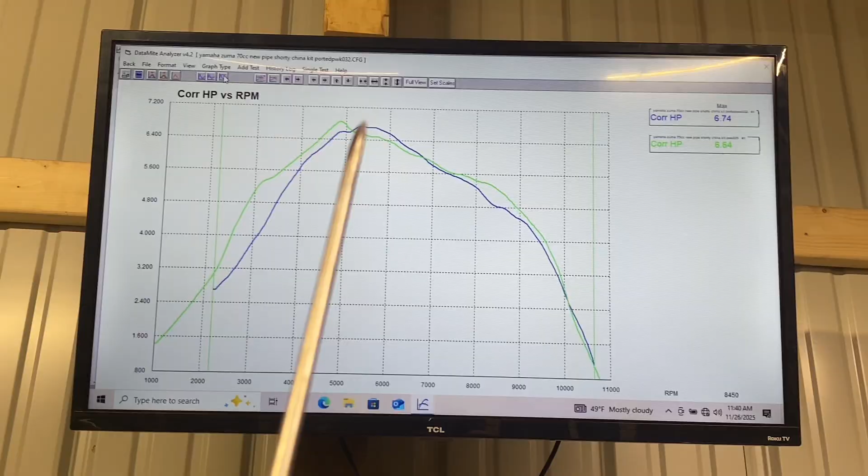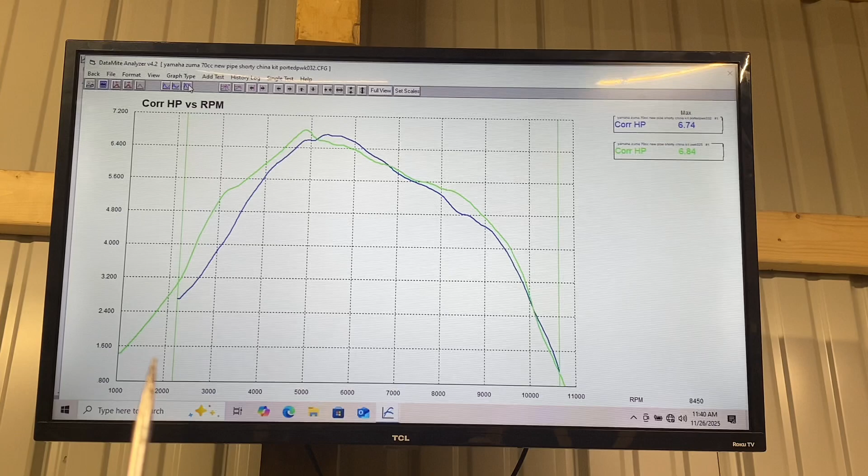Guys, now we're at a 120 main jet. Okay guys, here is pre-port work in the green. A little bit of a weird peak there, but that's okay. You could see that the power did shift, and that came from our exhaust port work for sure. So hopefully it doesn't get out of harmonics with the exhaust system. Hopefully it still hits good with the pipe, but it's feeling really good on the takeoff, and hitting that throttle blip with the work we did, it just responds a lot faster.

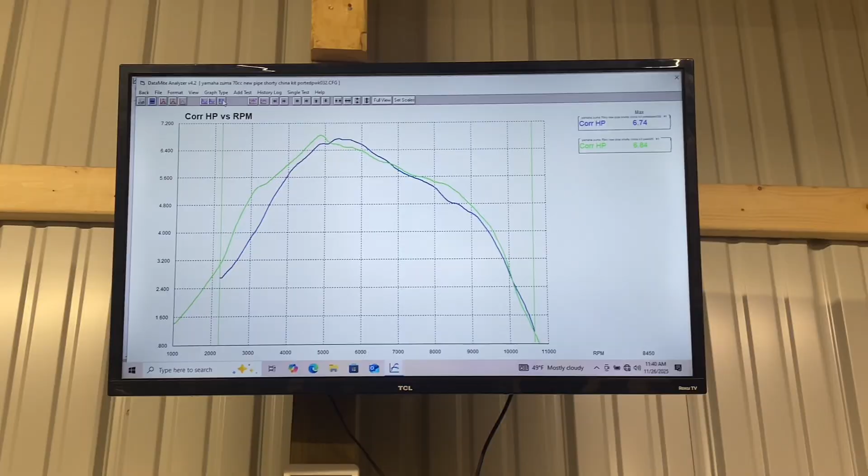And I know for a fact that this thing ain't jetted right. So let's pull this 120 main out, do a little more work, and let's go after the 6.84 horsepower, guys. We might have lost a little bit on the front side there, but that's okay. We're gonna pull timing on this thing very soon too. All right, guys, a 120 main jet.

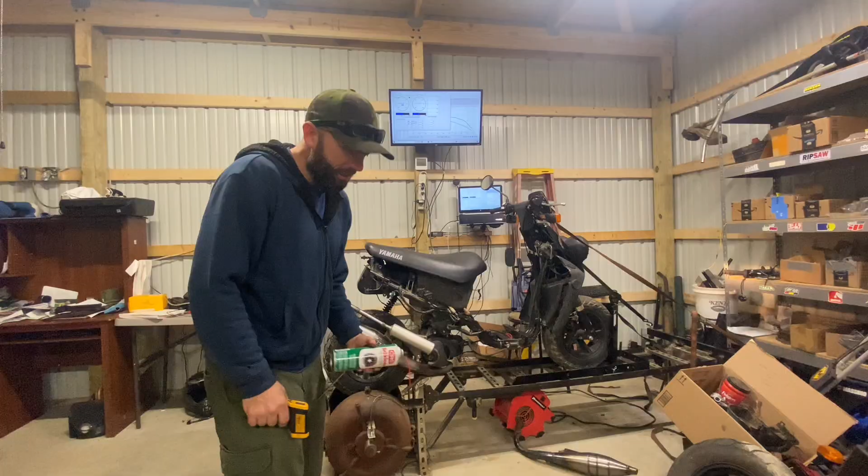So I got my carb spray, check that base, make sure it's not leaking. The way it's idling, I think it might be okay. And we're gonna keep an eye on the temperature. Okay?

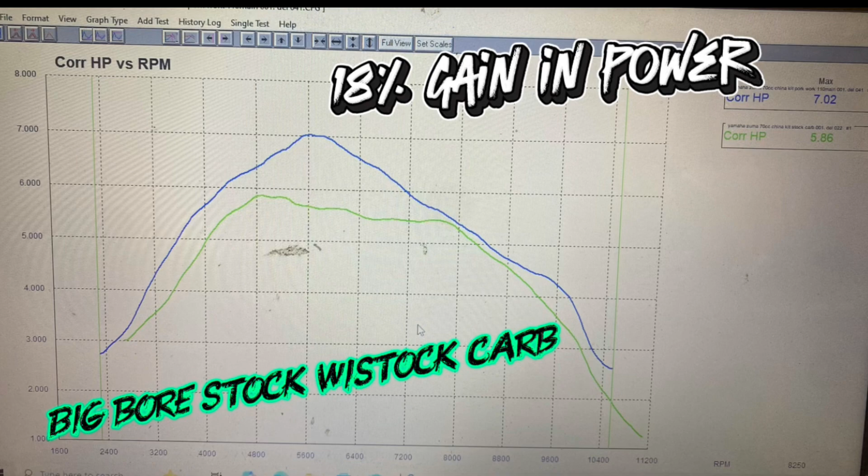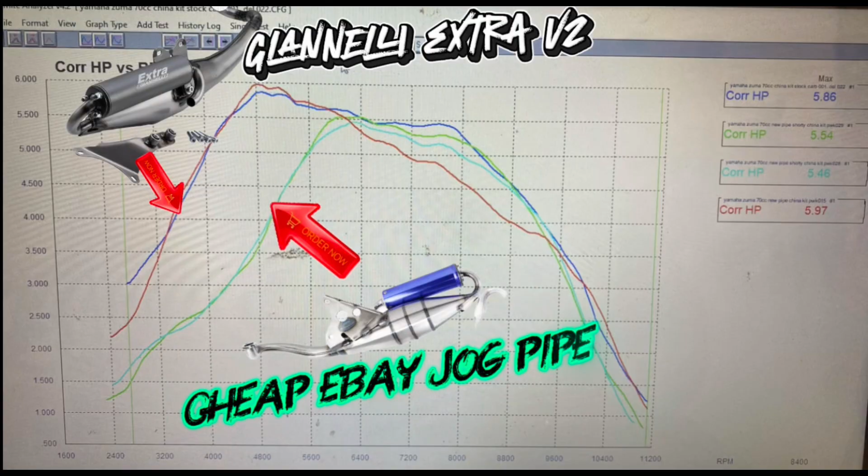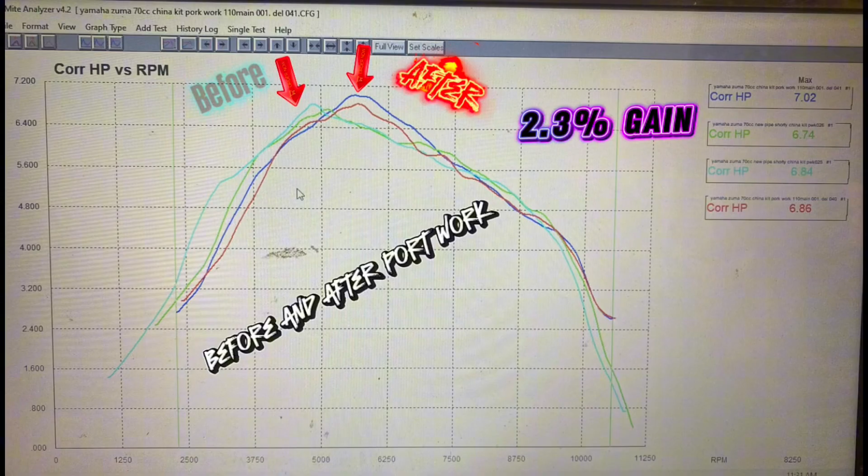One thing to keep in mind, the bike will want way less fuel. You think a lot of times with performance you need more fuel, but I've had this happen time and time again to where you port the cylinder and it wants less fuel. So long story short, guys, you're 100% going to have to prepare for some jetting. If you think your bike's spot on and you go and do some port work, you are going to have to change the jetting. I've had to do it every single time I've went in there and done port work.